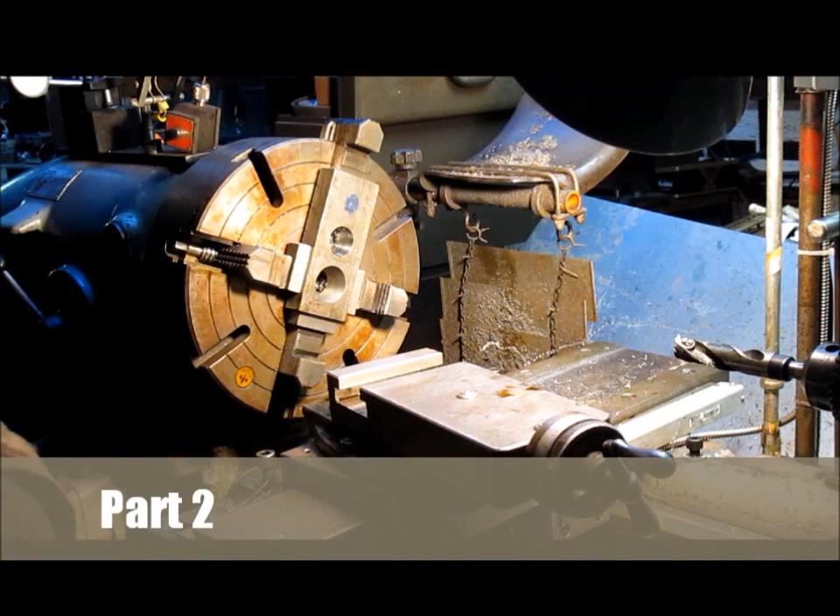Okay, probably about a year ago, I found this surface grinder, this interior surface grinder. It's actually a die grinder, in a garage sale, and it was perfect because it's all metal. And these days, die grinders are plastic, and they work fine. But to be able to clamp it, you can't do it with plastic. So I built this little bracket for it.

And it turns out the bracket is a little high. So what I do is just take a 1/4 inch bit and slide it in there a ways. Give myself a little bit of height back in the point, and that pretty much takes care of it. And I'm using a ball grinder because it seems to be able to get in there where almost every other grinder is not going to be able to.

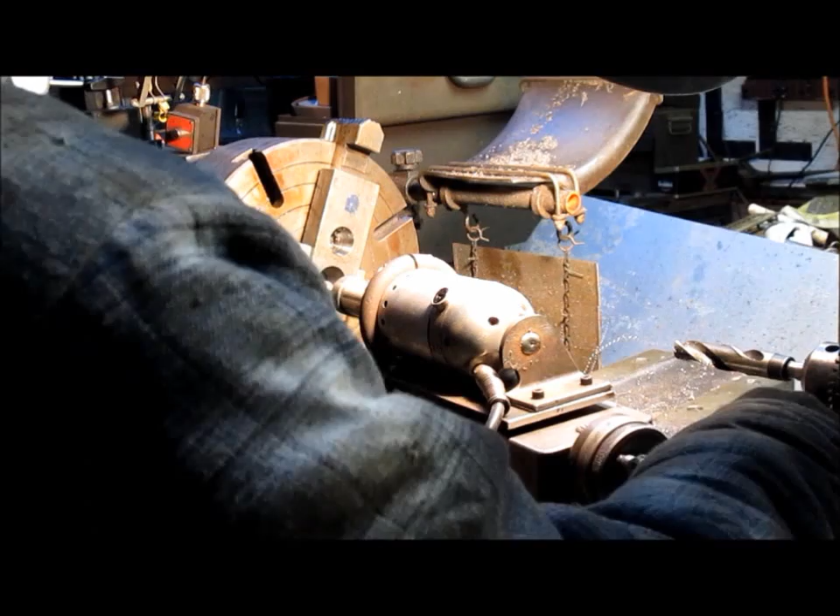Now, what I didn't do, and what I didn't think I needed to do until I came to this first project with it, is I didn't set it up so the grinder can rotate. And I just said, okay, well, the head will rotate and that'll be fine. Well, turns out this is the one project where it isn't fine, but it still works okay, and we're reasonably happy with the results.

And normally I would put a cloth down here, something like that, but I've got this extra jaw kind of sitting out here, and it comes pretty close. And my fear would be it'd be able to grab that piece of cloth and just spin it. So what I'm going to do is come in after the fact, clean up the mess, really polish this baby down, get all the grindings off of it, and then re-oil it and yada yada.

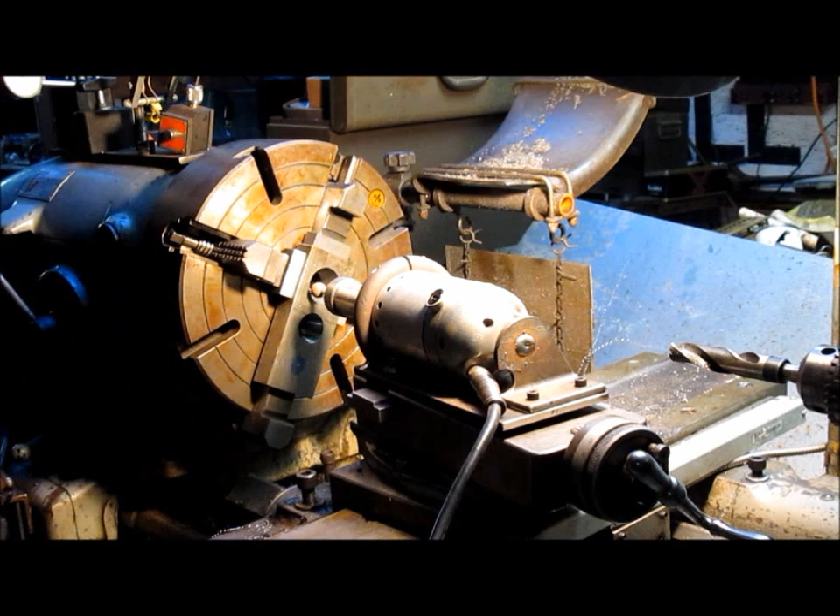So we are in the grinding stage, and this grinder makes a bit of noise, so I'm putting my headphones on. In until I see sparks. Yep, there we go. And then I'm able to grind in a little bit of rotation. Actually, that's more sparks than I want.

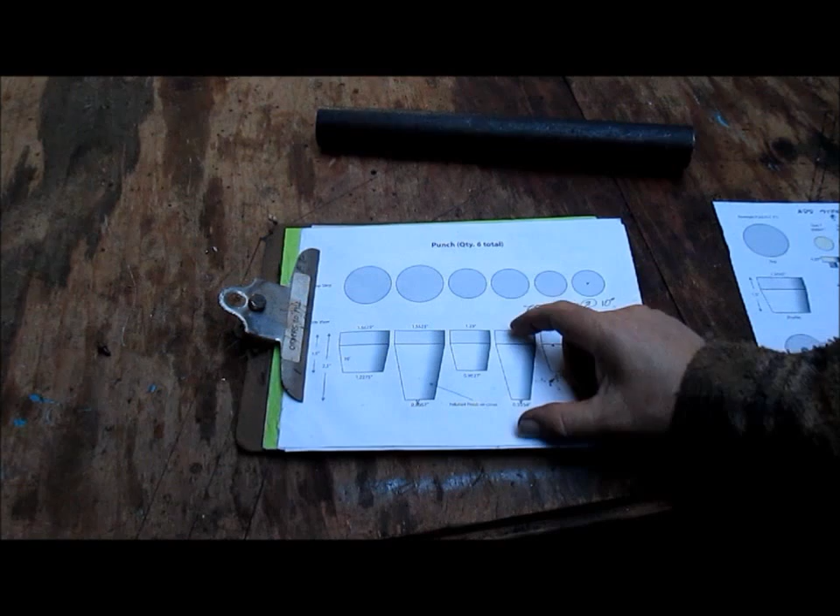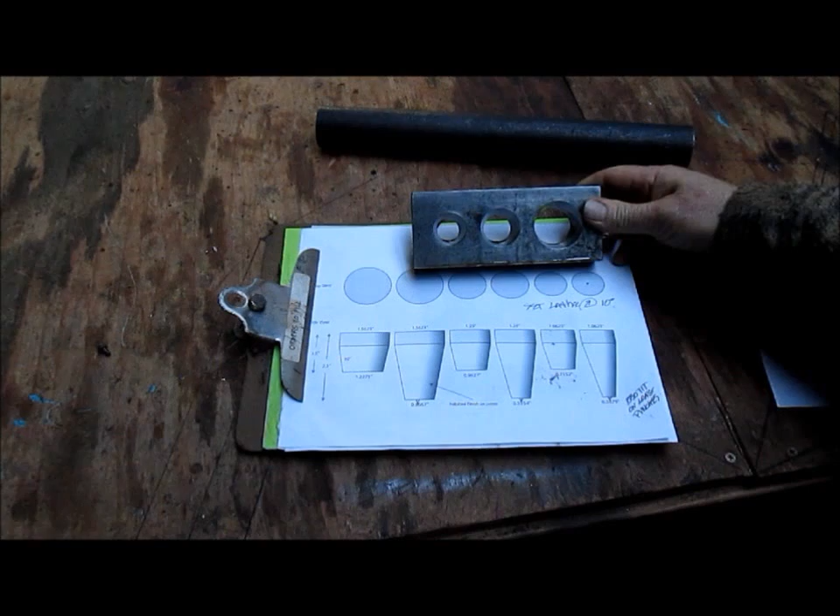Okay, the next part of this process is cutting the plugs or the punches for this process. And as you can see, one set of punches, the longer ones, are 2.5 inches, and the shorter ones are 1.5 inches. And they're set up to go inside of the receiver that we made yesterday. It's, by the way, the next morning. Nice, cool Thursday morning. So, our sizes vary, so probably I'll want to start with the biggest one.

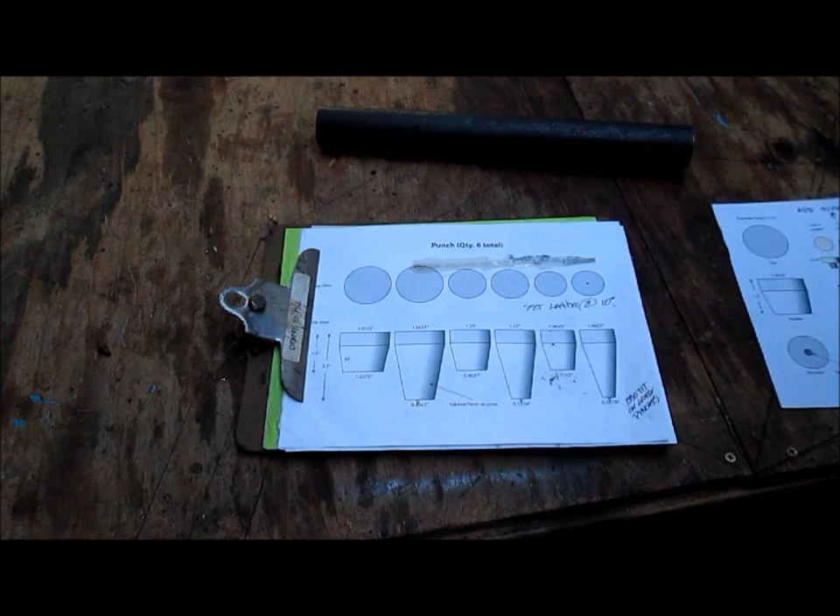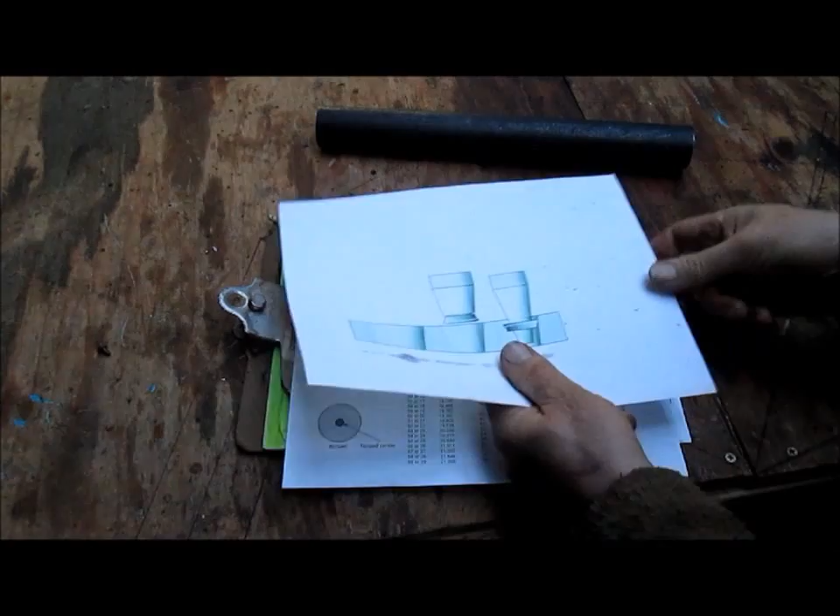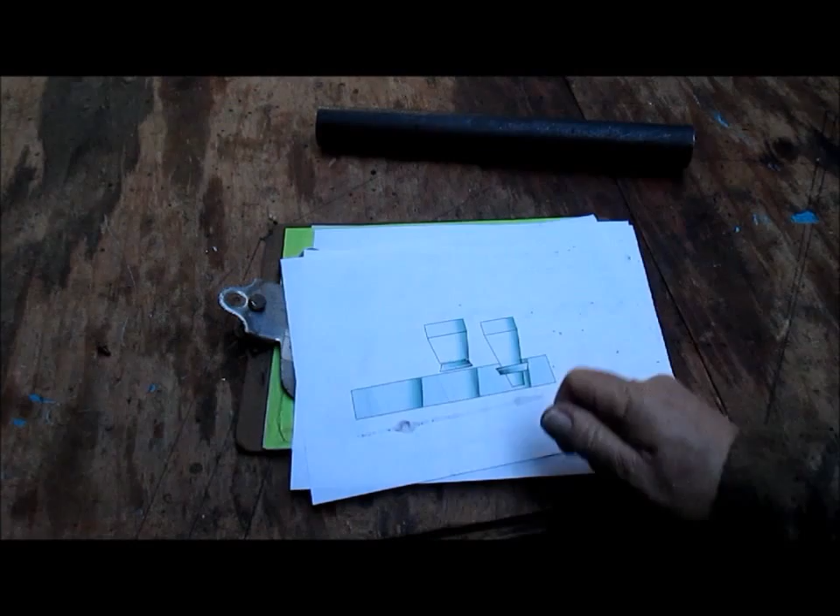Now, the other thing I have to do, this was kind of an afterthought with him, is to drill a hole in the bottom of the shorter punches and build some little plugs to go in the bottoms there. And I'll show you what his plan is here. There's his plan. He wants to be able to put the unformed ring on the shorter punch and just have it be centered so that when he pushes it down inside of there, it just folds that outer edge back in a bit, and so he gets more of a straight line. So yeah, I think it's a workable approach too.

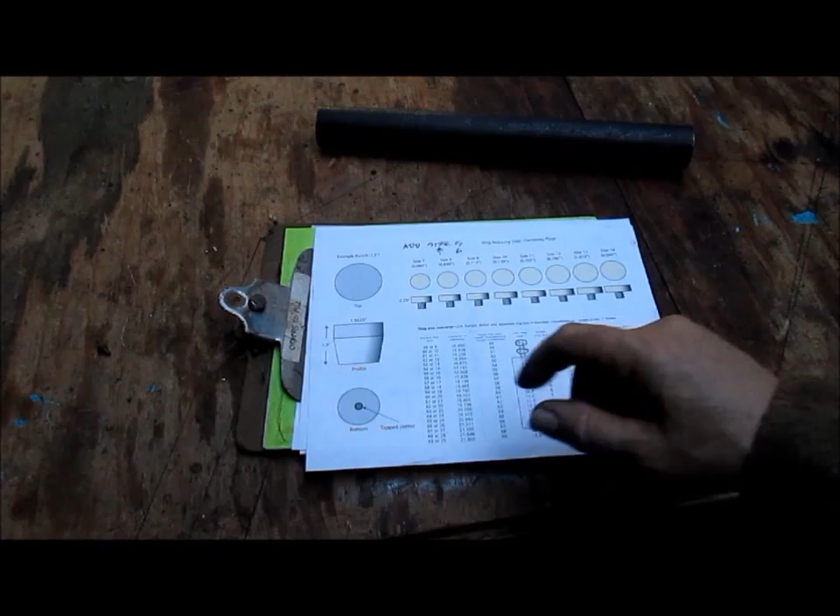So we're going to go ahead and start with our bigger piece, which is there, and we're at 1.5 inches or 1 9/16, and down to 12275 now. So I'll be back in a few minutes when we kind of get set up.

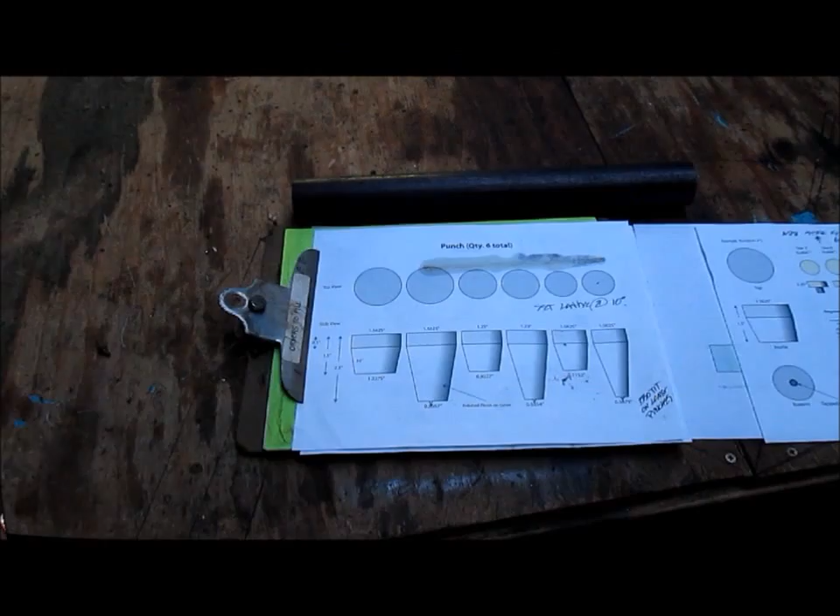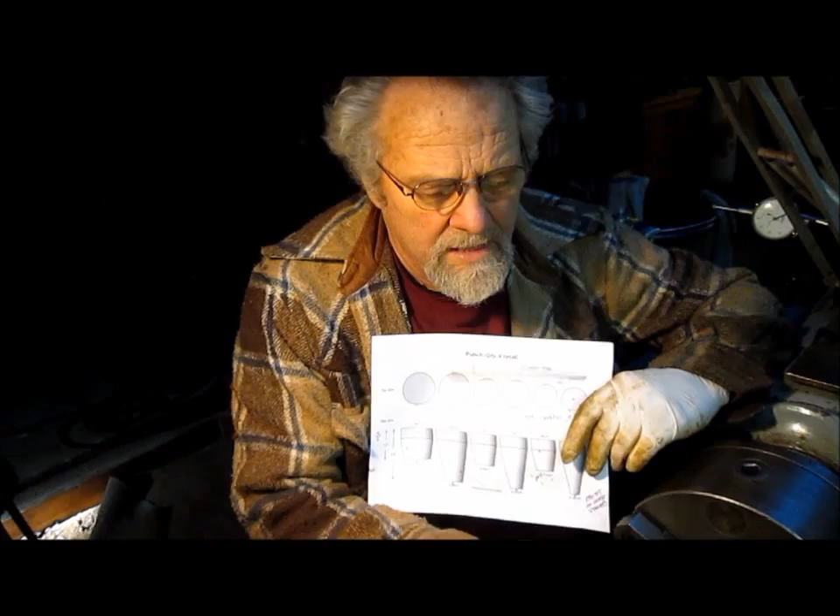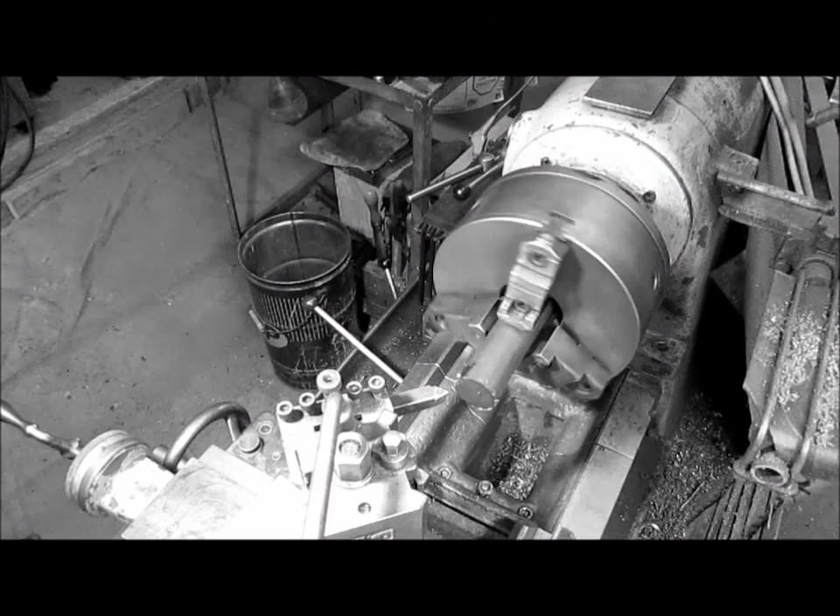As we spoke about earlier, I think I'm going to start with the long 2.5 inch, inch and 9/16 piece, and we're going to go ahead and just trim it down to the right diameter, and then take that 10 degrees off of it, and that should be it. Oh, and then go ahead and surface grind that in order to get it to match the negative. So we'll get started and go from there. I'd say we could go a little faster. That looks like a good speed.

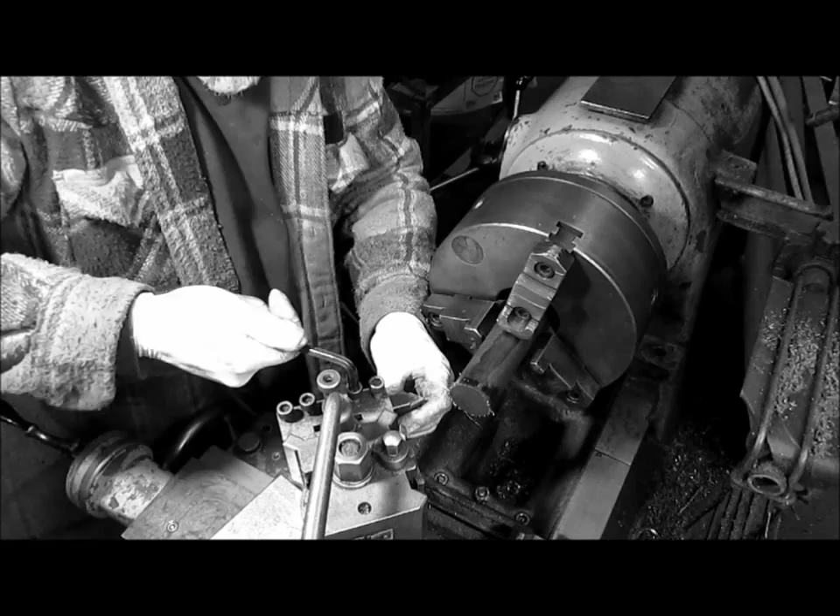Concerned that my bit is out a little bit too far, so let's drag that back in. We had to have that out on the last project to reach as far as we could to get this one little piece, and we just don't need to do that now. So let's get it back in so we don't have a whole bunch of chatter. Gonna make it.

As always, setup is the key here. So we'll just spin it around a little bit, and I think we'll have it. We're not going to be at the 90 that I wanted, but I think that's going to be fine. Just a little bit more.

Going to need to bring our plug out just a little further, maybe to about there. Now I think we got some. Okay, we'll take a cleanup cut so we can figure out where we're at and what our measurements are going to look like.

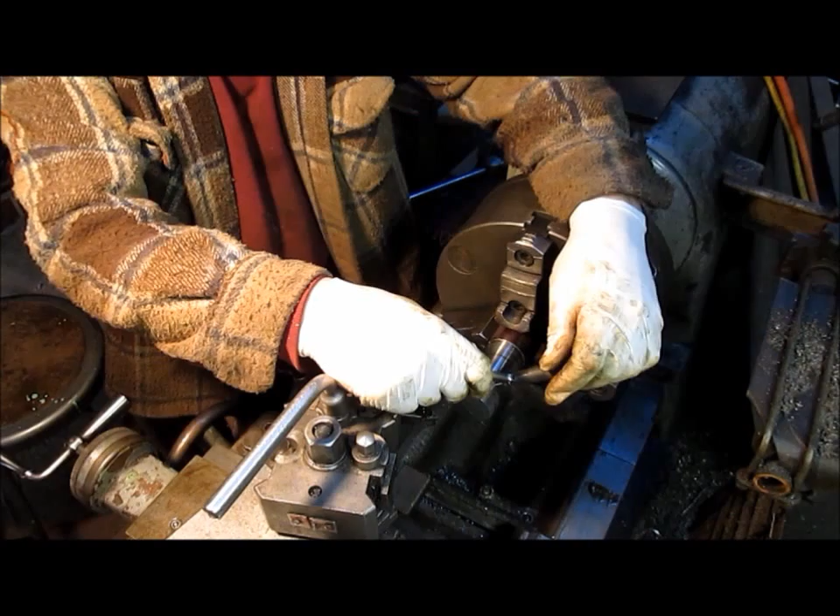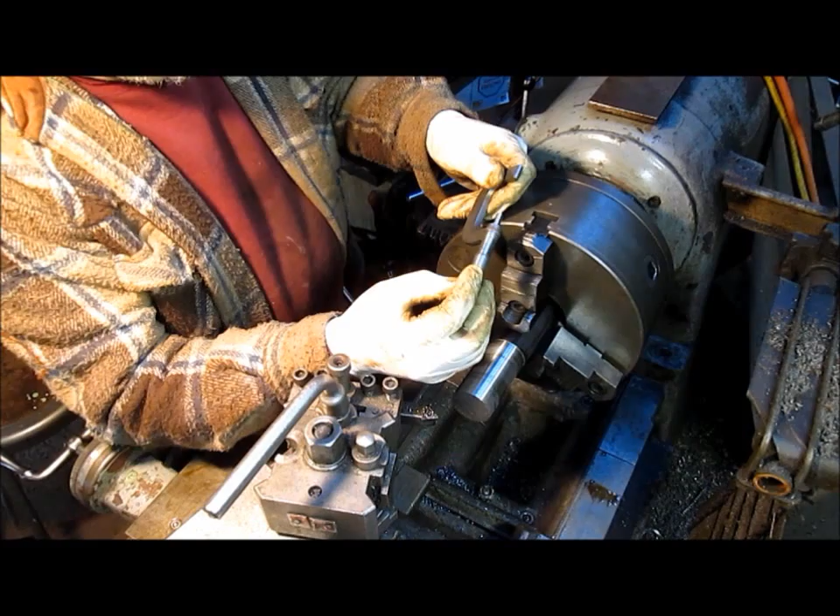We've got 1, 5, 1, 6, 1, 5, 6, 2, 1, 5, 1, 5. There's 50, 62. So we're a few thousand short.

So no problem. We can go to the smaller size, which is 1250. And 1250. So we got a lot to cut now. So we cut it a few thousandths too big or too small. Now we can just start kind of cranking in.

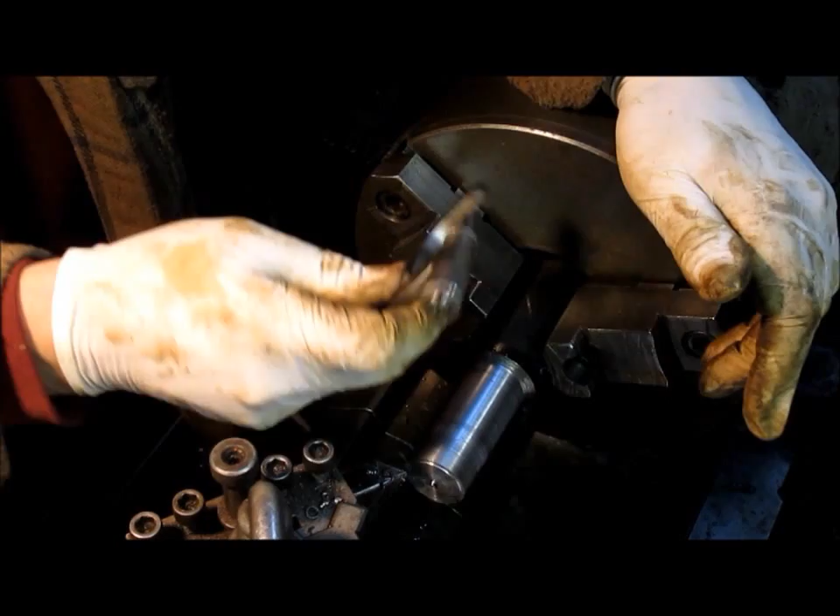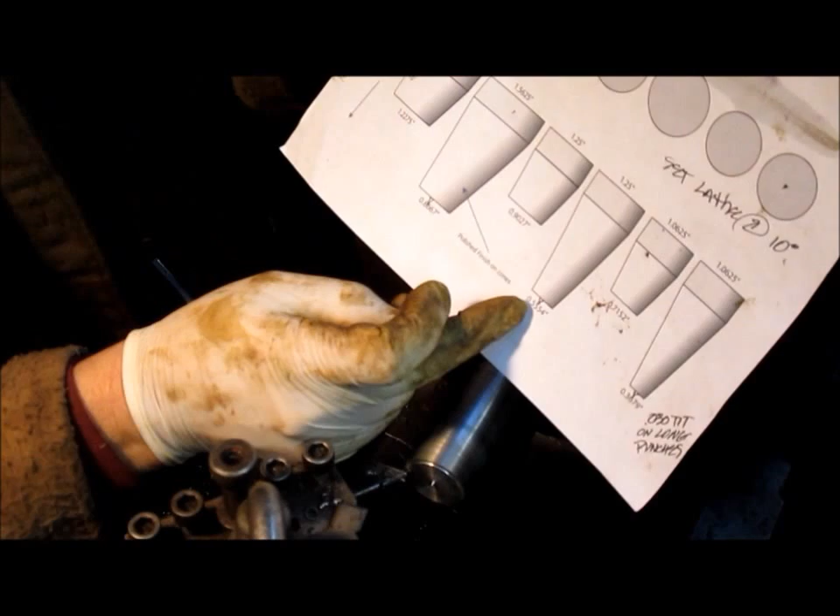Okay, we've got our shaft. Let's see, where's our micrometer? There it is. We got our shaft measured at 2/500, and we are on the money. And we're making this the third one over here. And we put the little nib on the end, which is what he wanted.

And now we're going to take the taper and go down to .554. And he says I don't have to be that accurate, but close is good. So .550 would probably be sufficient. So basically we're going to take our 10 degrees and just start cutting this by hand, because that's the way it's going to be. We're on the compound right now.

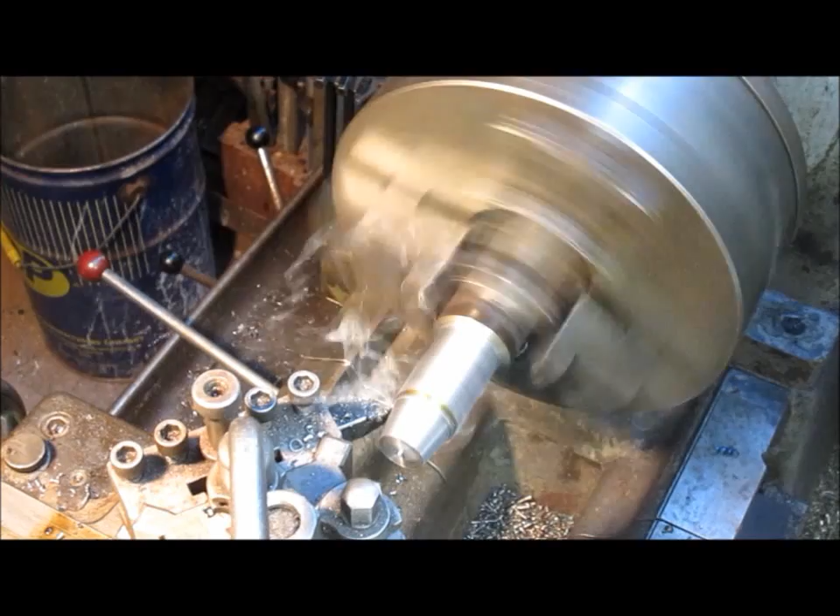So we got our taper cut, and we've got our own little home brewed tool post grinder that I made probably 2 or 3 years ago. And we'll crank her up and start cutting probably about a 1/2 thousandths per cut, just to not put a whole lot of pressure on everything, and just take it right on down.

Let's see, I think we go with this one. Take it up until it starts hitting.

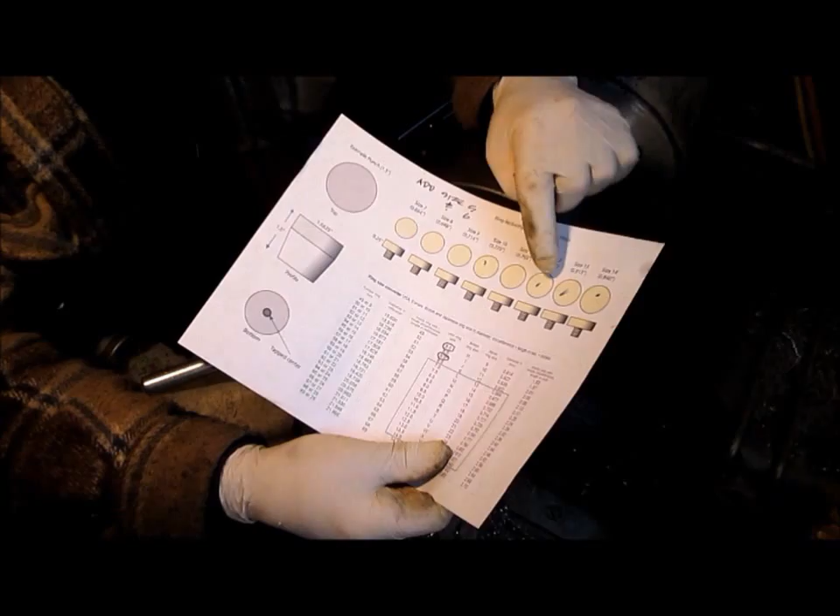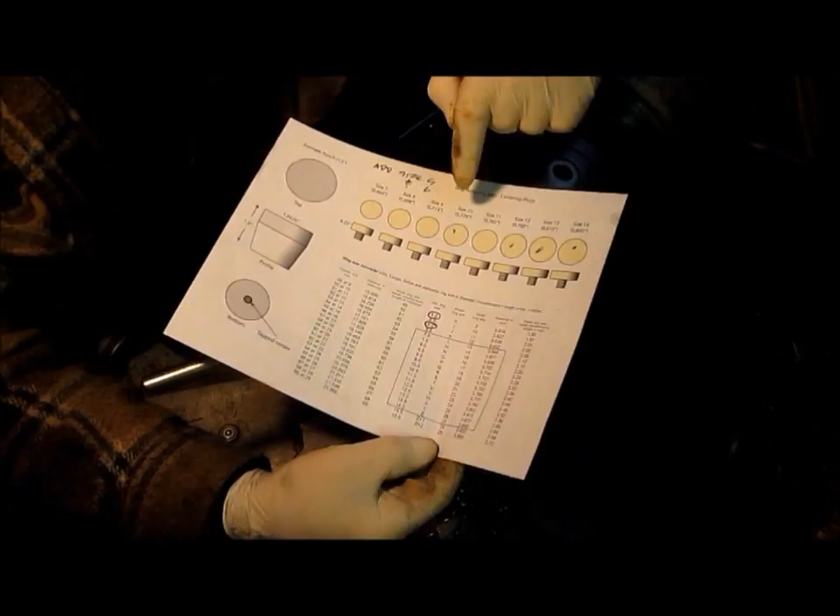So we're about 4 pieces into making these little plugs, and here I'll show you what we're going to make. He wants 1, 2, 3, 4, 5, 6, 7, 8, and 2 more, 9 and 10 sizes of these little plugs that are going to screw into the top of these short mandrels. And as I said, each one of these dots is ones that I've already made.

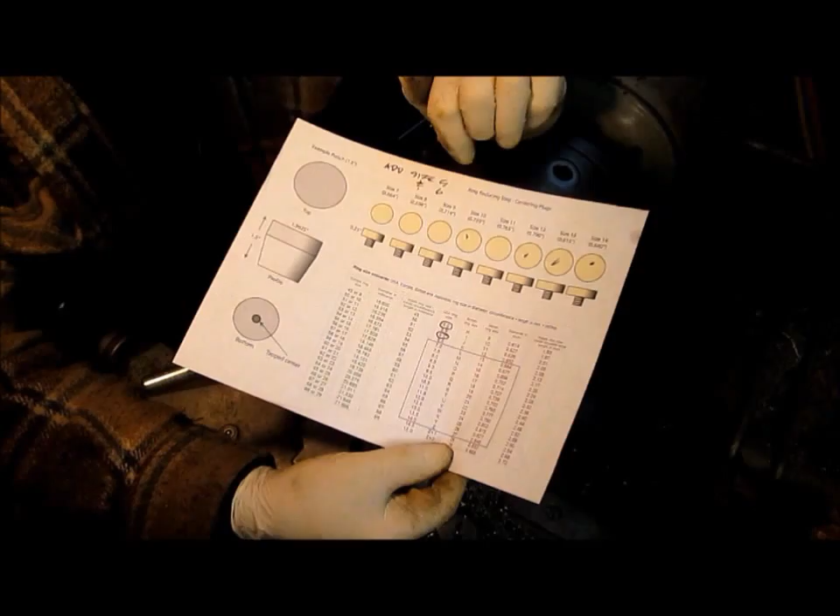We're going to work on size 11 right now at 765 thousandths diameter. And then we punch a hole through it, tap it and screw a bolt into it and then cut it off and braze it. So we're sitting here with about a 1 inch or a little bit bigger piece of bar stock.

And we're going to take this one down to 7650 diameter, and so what I like to do is set my micrometer at 7.5. What do we got? 7.6, 765, and then lock it. And I know where I'm at.

I've got my distance here, and I can continue to look at it as I cut and bring this down till I get close, and then we'll play with this other approach. Okay, so we're pretty close at this point.